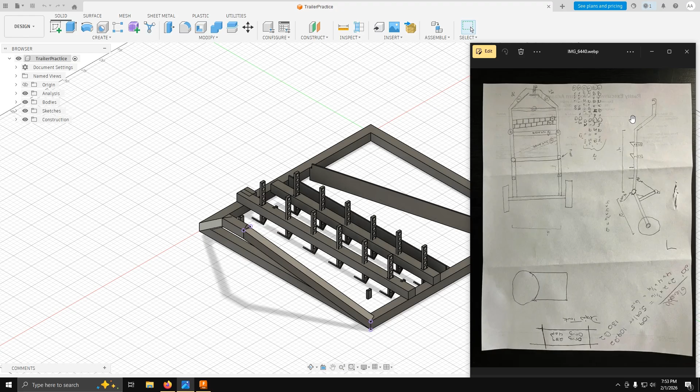This is a tutorial on making your road grader trailer in Fusion 360. We started this project about December 3rd, but I'm continuing with an online tutorial. I'm more than happy to come in and give you an in-person tutorial as well. My friend Alex is going to focus on the rear portion of the trailer, from the pivot backwards, while I'll focus on the upper two-thirds, from the pivot up to the tow hitch.

I went ahead and created this model of roughly what's going on, but we'll make it together in Fusion 360. To begin, we'll create a new design, so we'll do a part design, create new.

This brings us to our working plane. To start off, we'll go up to the top left to this browser area. There's units - we can click on change active units, then make sure we're in inches. Once your settings look the same, press OK.

Also, I'm going to be using the SolidWorks pan tools. If you want to follow what I'm doing, you can double check what you're using by going to the top right, clicking on your account, then preferences. It'll bring up all your preferences, and you can select whatever you'd like. Mainly, I'm using this pan, zoom, and orbit shortcuts as SolidWorks. You can press apply, and should be ready to go.

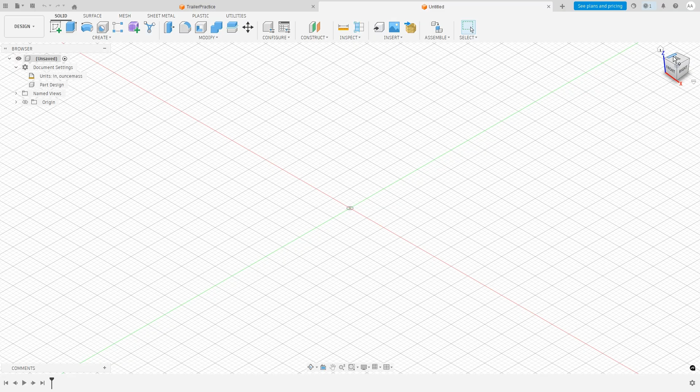To start off this trailer, this middle third is a 4x4 box, a 4x4 foot box, so we'll start by making that. To begin our sketch, we'll go to the top right section where this box is, click on the box, then go to the top left to create a sketch.

We'll click that, and now it'll prompt us to select the plane we want to sketch in. So we'll click here, the sketch top down, and start by creating a rectangle. We'll start off our drawing at the origin, click here, and as you can see, you can drag out for your dimensions, but it's a lot easier to just type them in. It's a 4x4 square.

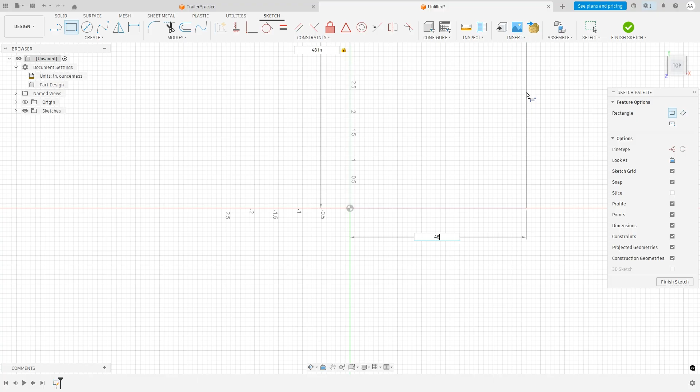Since we're working in inches, we have to convert these feet to inches. Of course, 4 feet times 12 inches would be 48. So we'll type in 48, then to switch to the x-axis, we'll press tab on our keyboard and type in 48 again, then press enter. That's going to be our sketch.

To get this square in our viewpoint, we'll use the pan tool by coming to bottom center with pan, click it, bring up this hand, and center it roughly. As you can see, the square takes up our entire view model. So we'll use the scroll wheel to zoom in and out of the object - scrolling inwards or towards your monitor zooms out. We'll keep doing this until we have a good view of what's going on.

Next we're going to define the square tube. My understanding is that you'll be constructing this frame out of square steel tube, which should be 2 inches in height. We'll begin by sketching this offset. We'll click the offset under modify, bring up this tab, and with curves selected, we'll click on the perimeter.

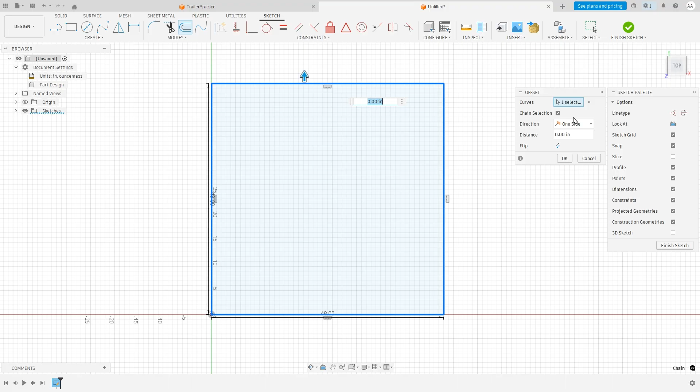Since the tube's going to be 2 inches thick, we'll type in 2 for distance. As you can see, this is going to go outwards, making our part larger to about 52 inches, which is not what we want. So we'll click flip so we keep our perimeter of 48 inches, and when it looks like this, press OK.

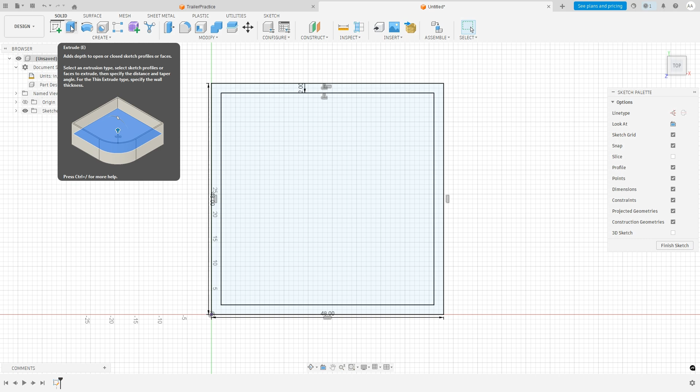That is the perimeter of the frame. Of course, this is a 2D object, so we'll go up to top left again, solid - as we're in sketch, we want the solid. Then there's the extrude cube. We'll click this extrude cube, and it'll bring up these settings now.

We'll click the profile, which will be this perimeter line, the inside perimeter line in between those two. As you see now, it's all blue. The tube will have a height of 2 inches, so we'll type in 2, then enter, and it extruded the object, so now it's 3D.

Granted, you cannot see this in this viewpoint, so you can either use the square up in the top to rotate your view, or you can press down on your middle mouse button and rotate the object. And of course, you can click on the object to reset your viewpoint.

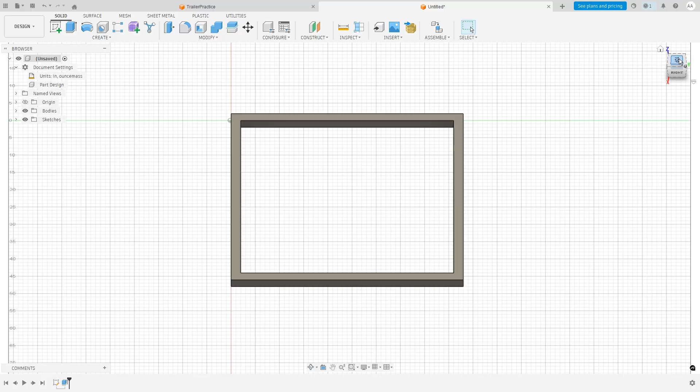Cool, so now beginning with the angle iron, we'll start simple. We'll start with this angle iron here and here, these two points as well. So we'll start by creating those two.

We're gonna make sketches on the inside of this plane, but as you see when I click this front, we can't see the other side of the wall. So what I'm gonna do is reset my viewpoint and zoom out a little bit.

So to solve this and see inside this square, I'm gonna go up to the top center to inspect, go down to section analysis. We'll start off by clicking these yellow planes, clicking the Z axis, and we want to go to the center of the object.

The object is 48 inches long, so half of 48 is 24. So we'll type in 24, and now it's split in half. So click OK.

If you ever want to go back to the full object, in the top left, a little bit lower than the toolbar, there's going to be all these folders, underneath the analysis. If we click the drop down menu on the analysis, this brings up our section view. I can click this eye to take away that section view, but for right now we'll leave it on.

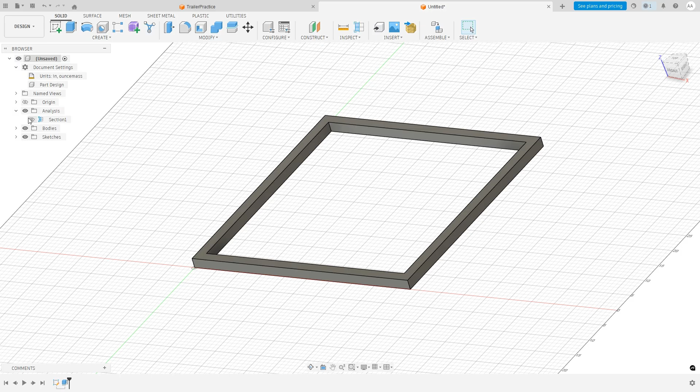So now to sketch on the inside of this for our angle iron, we'll use either the box or the middle mouse to rotate your view. Oh hold up, there we go. So now we're looking at the inside.

We haven't defined which one's the forward-facing direction, so we'll do that now. To start sketching these angle irons to smooth out the dirt, we'll go to create a sketch, and now we want to sketch on the inside of this tube. So we'll click on the inside of the tube, and it'll bring up our sketch plane.

Now I'm going to use the pan tool to center this a bit more. And there we go. So what I'm going to do now is assume that this middle angle iron is going to be exactly halfway backwards.

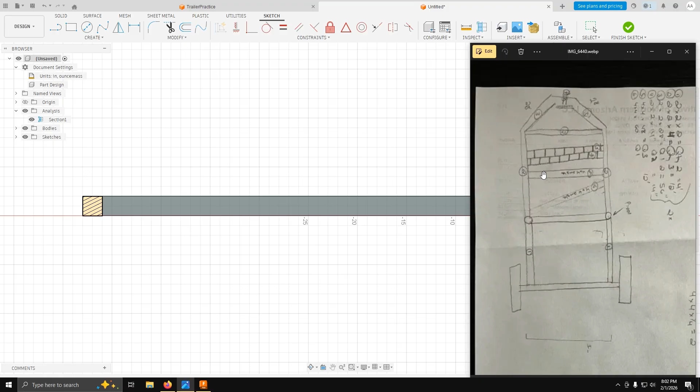So we'll start by bringing a line from the origin. You click on the middle of the origin, now it brings up this line. Keeping in line with this bottom row, we'll go to 24, type in 24 inches, as that will be our halfway point. A good way to check whether or not your line is along that green line is it'll say 180 degrees.

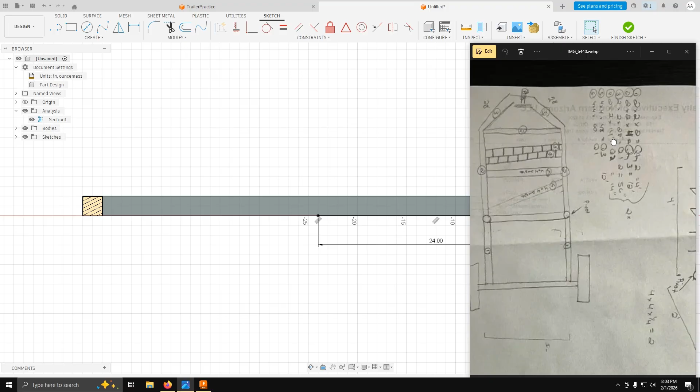Cool, we'll start creating the angle iron. What I have written down is that the angle iron, somewhere in here, is 4 inches tall and 4 inches wide. So to create that profile, we'll go back to this line function.

At this point, what we specified is halfway. We'll start off by creating the angle iron. My thoughts for the angle iron is that it's 4 inches tall, and this beam's only 2 inches tall, so we'll have the middle of the angle iron connected to the tubing.

In order to accommodate for that, so 2 inches here, we'll go another inch beyond. So we'll type in 3 inches, and then we'll press enter.

To get rid of this reference line that we made, we'll actually go up to modify and hit the trim tool. This is one of the tools you can use to get rid of lines. So you can click on the line at both points, and now this line itself is isolated.

So now to continue creating this angle iron, we'll go back to making a line, and we'll click at the bottom of this point here, as we wanted to go an inch below, so we'll type in 1 inch.

Click line again, so now we can start defining the angle iron. It's going to be 4 inches long. We'll click, and pressing left click on your mouse will keep the line tool open. Pressing enter will submit the drawing and close it. We'll use click, just clicking with our mouse to speed up the process.

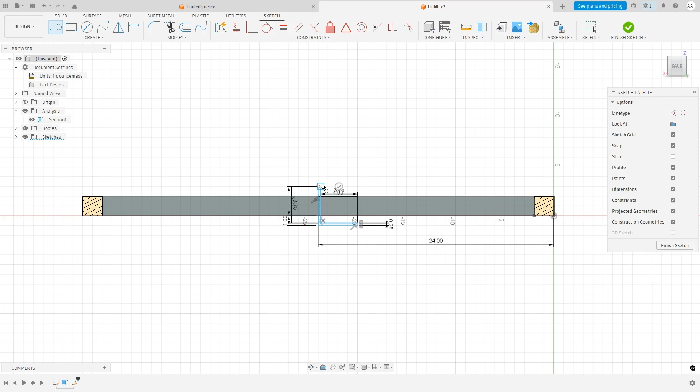Click, then you can zoom in for this next part, and just attach these points as so. Here we'll zoom out, center ourselves, and since we're here, we'll go create the other angle iron as well.

So I'm using the pan tool. For right now, we'll offset the starting point a little bit behind it. We can click here, and let's say we want it 1.5 inches behind. So we type in 1.5, click. To escape this line tool, I'm going to press escape on my keyboard, and it gets rid of the line.

So again, to create this angle iron, 4 inches tall, we'll type in 4, press enter. Then we'll go across 0.25 for the thickness, click, down 3.75, click, across 3.75 for a total length of 4 inches, down 0.25 for the thickness, and then we'll connect it back.

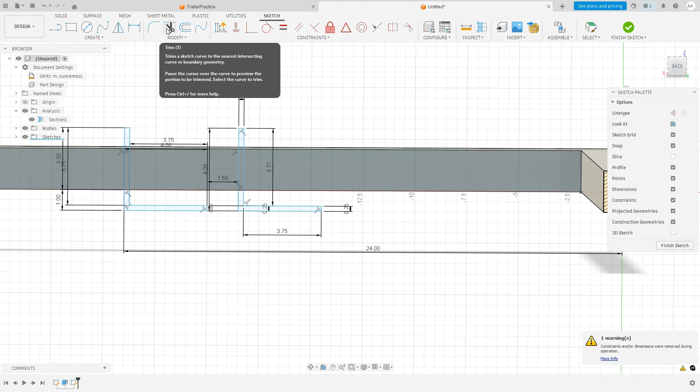Now these two angle irons are connected to each other by this line, which we don't want for later. So we'll go up to modify, click the trim tool, and click that line. Now we have two sketches of the angle iron. We'll hit finish sketch, and the computer loads everything.

Now I'm going to zoom out to get a full picture of what's going on. I'm going to go up to this analysis and hide the section view so we can see exactly what's going on. Now we're going to extrude these angle irons as we have the profile.

To do that, I'm going to zoom in on this first one, because this middle one is going to be straight across, quite simple. To extrude again, we'll go up to create, to extrude. For the profiles, we'll select this box, and this box. Then we'll zoom out.

As we want to reach to the other side, we'll make sure it's on one side and then to object, and we want the other object to be the other wall. So we'll zoom out, zoom all the way around, and click the inside wall. As you can see, it made the part, and it looks all good.

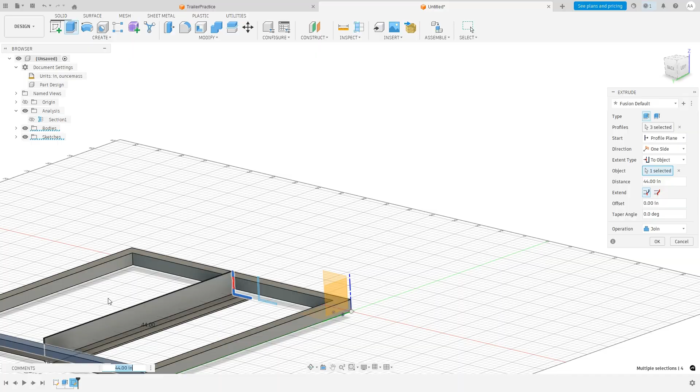For editing these objects later on, make sure for these operations you click new body, so it's a separate item. We'll click OK, as everything looks right. And there we go, that's our first angle iron.

So then going back to the sketch, as you can see, the sketch is hidden right now. We'll go down to the drop-down menu, click drop-down the sketches, and click view to view this other sketch that disappeared. Now to extrude this one, we'll do the same thing.

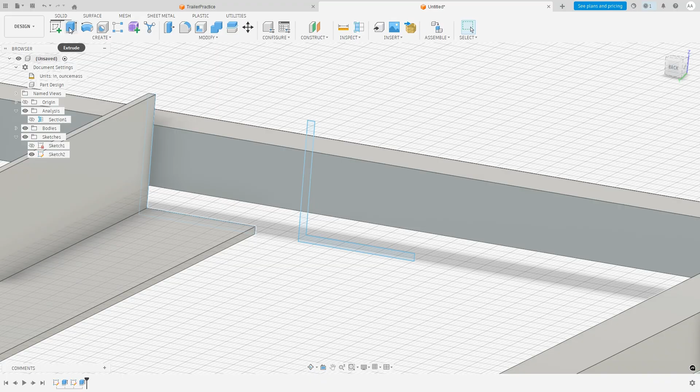Extrude in top right, click on these squares, and we will go to object, same thing, across. Here I'm going to pan, just to have a better view. With that all looking good, once again for operation, we'll go to new body and click OK.

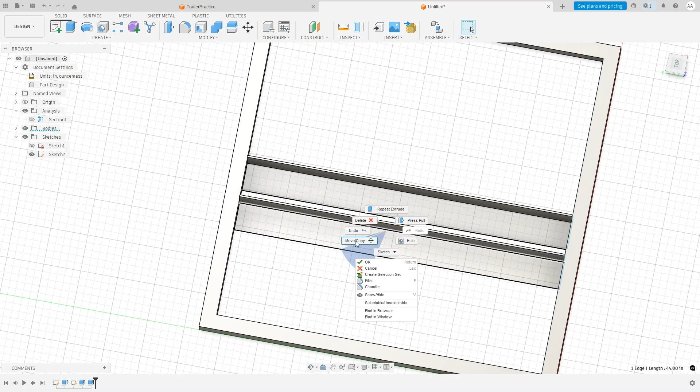According to this sketch diagram, we do want this at an angle. The angle isn't specified, but it looks to be about the same distance, like 1.5 inches roughly for this angle. So we will right click on this object, then there'll be this move tab. We'll click move, and drag the circle as it'll rotate the object. I'm figuring 15 degrees looks about right. You can type in if you want a bit more, but for right now, I'll stick at 15.

Right now, this angle iron is overlapping with the straight piece. So we will drag it down so it's out of the way, and then across.

So it's in the middle like this, so it touches. That looks okay there. So we'll click accept.

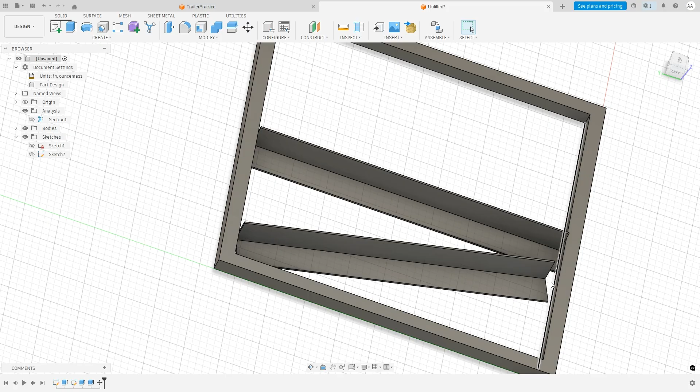Now I'm gonna hide this sketch. To get this angle iron to touch these walls so it looks a bit more proper, we'll zoom in on this one edge, right click on it, and there's gonna be an extrude option. We'll extrude the object, click this wall, and this time we'll use join. And there, that's how you get the angle iron to be flush.

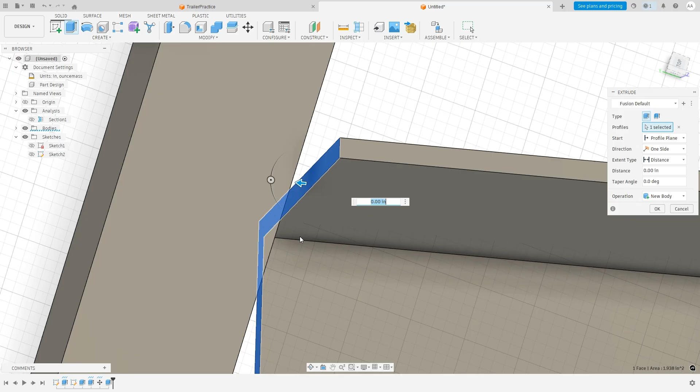Then we'll rinse and repeat on the same side using the pan tool to come over, zooming in. We'll select this inside face—sometimes you need to zoom in a bit more to get a better selection. Right click, extrude, then we'll do to object, select the inside wall so it mates up well, and click OK. Okay, cool, this is kind of what we're looking at right now. So we have our angle iron set.

So did a little bit better job on this one. So now this next part is this angle iron setup to chew up the dirt.

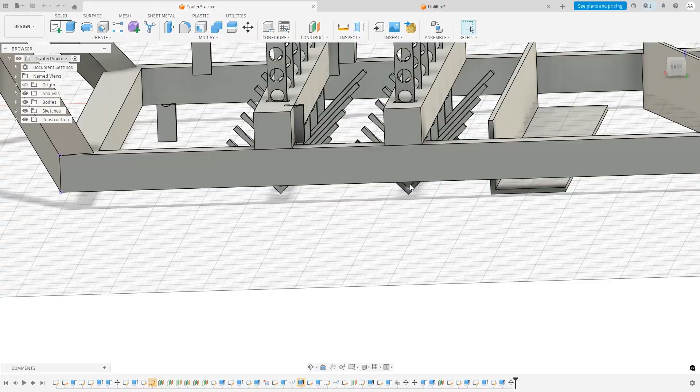I admit it's been a while, so I don't exactly remember how you want this angle iron setup to be, but my own two cents was this: we'll have the same diameter square tubing going across, and then we'll have these angle irons at a 45-degree angle with adjustable holes, so those could break up the dirt, and of course they're offset, as you can see. So that's my own two cents of how I thought that should be done.

So to start off, we'll go back to our own part. To begin sketching these angle iron shapes, we will create a plane to sketch off of. We'll go up to construct, click offset plane, then we want to sketch off the inside of this tube, so we'll click on the inside.

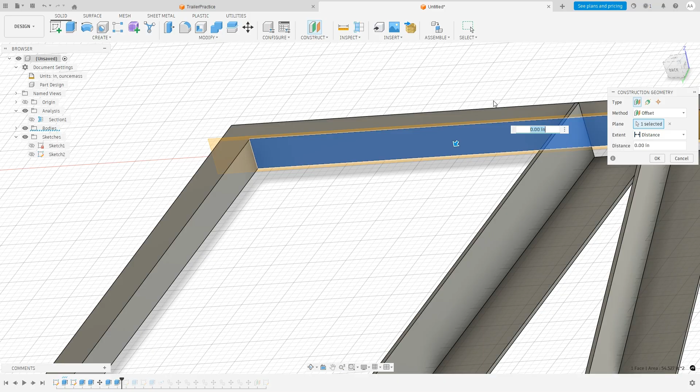So doing the math—between wanting 6 angle irons and 40 inches across, I want these spaced 6 inches apart. The tube, of course, is 2 inches wide, so we need 4 more inches to get the 6. So we'll click there. Now to start sketching, we'll go top left to create a sketch.

Then we'll click on that plane we just started to sketch on. Now, of course, our view is blocked by the bar, so we'll go back to analysis and rehide the section view. Now we can see inside, everything's looking proper.

So now we'll click on the line, and now we get our grid up again. Each one of these grid squares is half an inch, so we know from this angle iron down here that 2 squares down is 1 inch.

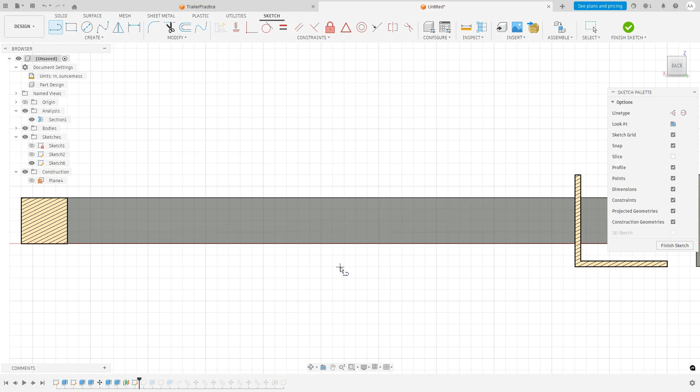So we'll click down here and start sketching this angle iron. Of course it's 4 inches long, so we'll type in 4, then press tab to get the degrees over here. We'll type in 45 degrees, left click.

Then I'm going to do the other angle, so I'll press escape, go back to the line, start again at this vertex. It's 4 inches long, so we'll type in 4. Then to lock in this angle, since we're going the other way now, it's going to be 90 degrees plus 45, which is 135 degrees. So now we'll left click on the mouse so we can keep sketching.

Go back the other way. The angle iron's quarter inch thick, so we'll type in 0.25, tab, make sure it's at 90 degrees, left click.

And then, of course, to get back for the thickness, it's gonna be 3.75 inches. Click tab, we want 90 degrees. Left click, and we'll go back this way—4 inches long, tab, 90 degrees, click.

Oop, almost—I did 4 inches, that's my bad. Sorry, we'll do that again. 3.75, to account for the thickness. And we'll type in 90 degrees.

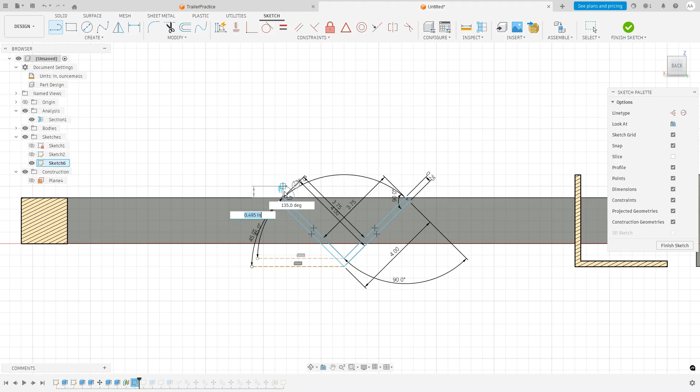Oop, where's my mouse? Hold up. One more time—3.75 inches, and then 45 degrees. And then lastly, we'll zoom in and connect these dots.

And then we'll press finish. We'll go now extrude this object. I'm thinking for this object we'll just use 1/2 inch thick angle iron, so we'll type in 0.5 for the distance, new body of course, and we'll click OK. And that will be our angle iron extrusion.

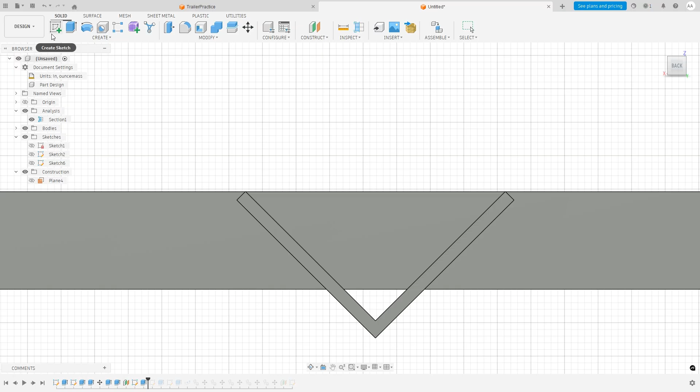Now in order to mount this angle iron to a pin system or something, I was thinking we would use a 1 inch wide, 1/2 inch thick plate steel. So going again, we'll go on constructions, we'll click view on this plane so we can draw on it again. So we'll create a sketch again, click on the yellow plane we just highlighted again, brought us back to the origin, so we'll pan back over.

So we'll go back to line. Starting off at this vertex, I was just gonna say it would be 1 inch wide. So of course start off in the middle, so we'll do 0.5 inches for our first point. So now I'm gonna press escape.

Now we're gonna go up and select the rectangle. We'll start on this outer point. We'll drag it out. I was thinking to give the most amount of mounting options, we'll make this 10 inches tall, so we'll type in 10. And then to lock in this width, I'll type in 1 inch. And then enter to lock in the part.

So we'll click down here at the vertex. Roughly, it's not on the same sketch plane, so that's why we won't be able to snap. But we'll click roughly about where that other vertex is. And we'll draw out to where it meets up with the line, about there. And then going back about there. And now we'll go up to modify for the trim tool to get rid of these lines. And then there we go.

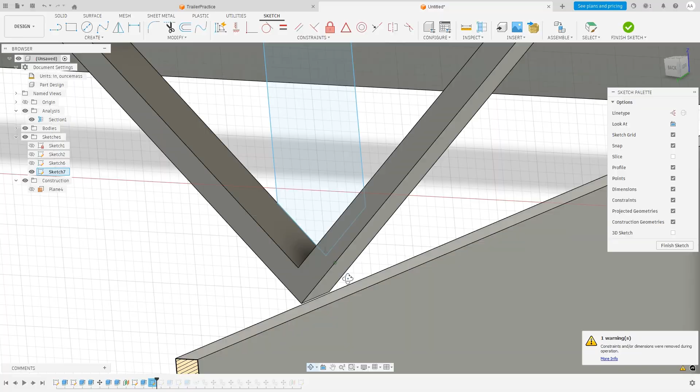We have our angle iron, or our plate steel. So now in order to make this meet, we'll go back to solid and we'll click extrude, click on this plane, then 1/2 inch thick, and it's wanting to cut, so we're actually going to do a join or a new body. We'll click enter, and then there we go. So we have our separated plate steel from our angle iron.

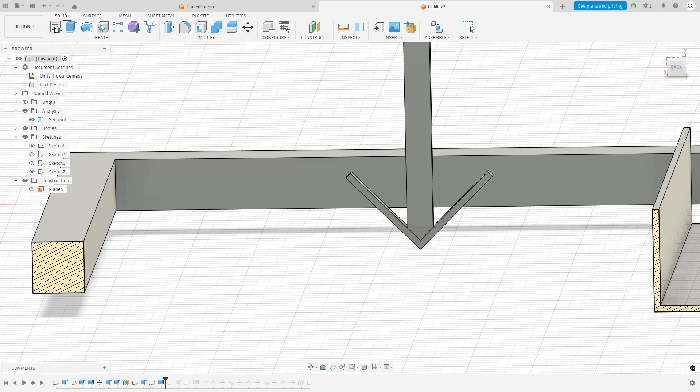And now in order to create these holes for a pin system so we can lock in the height, what we'll do is we'll click create a sketch, and we're going to sketch directly on this plate steel face. Browse back to the origins, we'll pan back over, and then we'll go click create a line. So start the vertex all the way down here, go up 1.5 inches, and we'll click enter. And now we're going to go back to create.

Now we're going to do center circle, click on this point we just made. Then I was thinking 0.75 inch diameter, and then we'll press enter. So now we're going to go back to this modify tool. We're going to click this trim tool, get rid of that line, get rid of that line, and now go back to solid, click extrude.

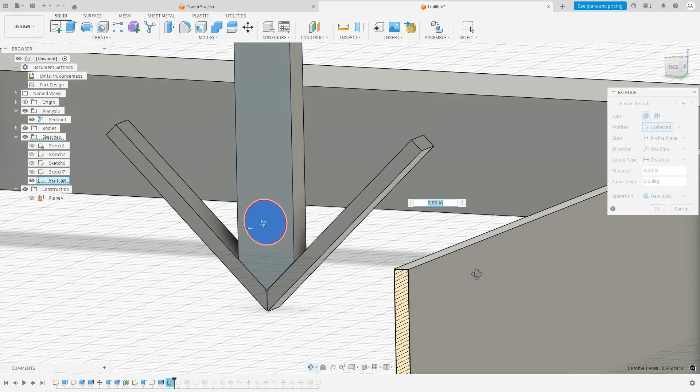Then on this profile, we'll click on that circle we just made. I'm going to rotate it just so we can see what we're doing. And then for operation, we're actually going to do cut, as we want to cut away a hole. So we'll go back to this distance, we'll go 0.5 inches. As you see, it's wanting to go outside, so we'll put a negative sign in front to make it go all the way through. That all looks good, so we'll click OK, and then there we go. Now we have a hole for a pin to slide through.

So now to copy this hole up and beyond, we'll go down to create pattern, and we'll do pattern along a path. I think default option is bodies. So we want to click features because this hole is actually a feature of this part we just made.

So we'll click on the circle as so, and then the path. So I'm going to zoom out a little bit so I can see a little bit better what's going on. Sorry, so I'll go back to pattern, circle and pattern, features, select the circle.

So now back to the path. We're going to select one of these lines on this plate steel, as we want the circle to go up the line or in line with that. So now you can see there's this dashed construction line that's telling us that's where the circle is going to go.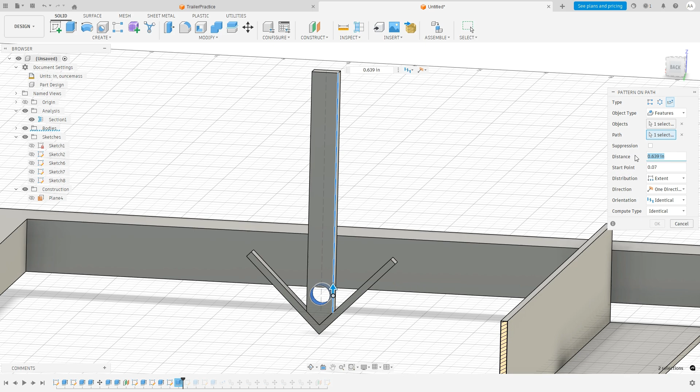So now for the distance, so the entire plate is 10 inches long minus the 1.5 inches, as that's where our circle starts. And then I'm going to take off another 1/2 inch just so the holes don't go beyond the part. So I'm going to type in 8, and then there we go. That's the holes. So this quantity thing, you can go up or down for how many holes you would like. I think I'm going to go about to 8. That gives us a good bit of options. So now we'll click OK, and then it cuts holes through all of them.

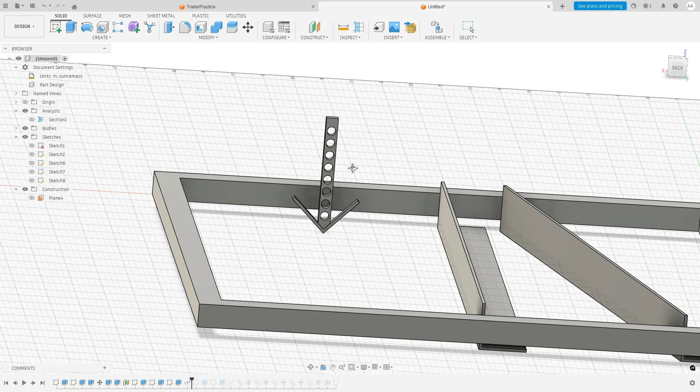So now I'm going to zoom out just so we can see exactly what's going on with our part. I'll go back to analysis, hide the section view just so we can see the entire part. As I was saying earlier, I want 6 of these parts, but it's quite a hassle to do that entire process all over again.

Luckily, we can actually go copy these items. So we'll right click, move and copy, and make sure it's on bodies as we just created a body. We'll select the handle and select the angle iron. The move type should be on free move by default. We're going to want to switch over to translate.

We're going to want this part to come across to the other wall, so it gives us our component directions. We're going to want to bring the Y direction. The reason why I know this is in the top right for square, it gives us our axis with X in red, Y in green, and Z in blue.

I was saying I want these spaced out by 6 inches, so I'll type in 6 here and create a copy. And then there we go, we have 2. Now I'm just going to go a bit fast to get all these angle irons in. I'll keep going till I have 6. There we go, now we have 6, and they're all evenly spaced, more or less.

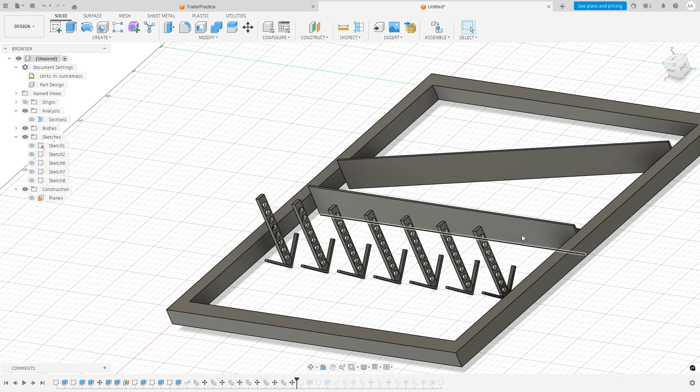So now I'm going to go back to sectional view. I was thinking what we could do for mounting these was using the same tubular steel, or sorry, square steel that's going to be used for the frame. In order to do that, we can sketch that by going up to construction, offset a plane. We want this square tube to be mounted off the top of the frame.

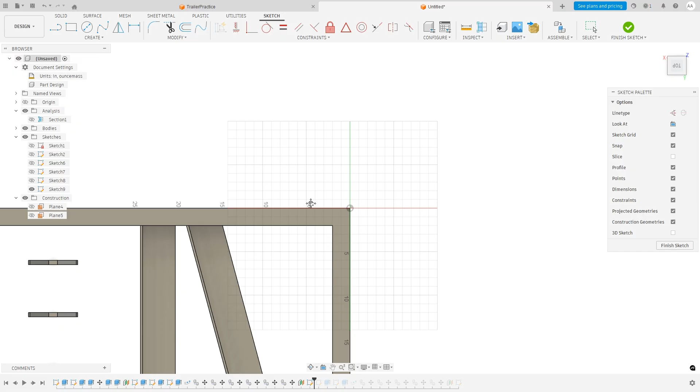So we'll click on the top of the frame. It gives us a big orange frame. We want to be touching, of course, so leave the distance at 0 inches. Click OK. Now to start sketching, we'll go to create a sketch, and we're going to click the plane we just created. It's going to bring us back to the origin, so we'll use pan to zoom back over.

Now we're going to zoom in on this bottom part, I'll tell you the reason why. This entire part is 1 inch long, and we want this to be in the center of our tube to go across. So click on one of the vertexes, we'll go across - either way, we'll do this way, 0.5 inches, as the tube will stick out 0.5 inches.

So now we're going to zoom all the way out. We might need to pan over. So we'll click on that, all the way down. So 6 inches, we just want to get to the edge of this. 6 inches at 90 degrees sounds good.

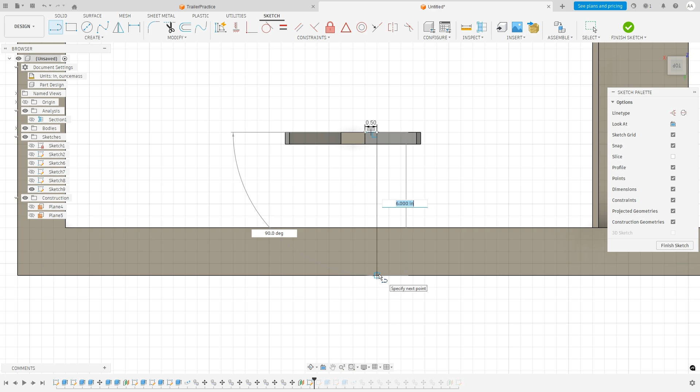Now we'll press escape, create this 2-point rectangle. We'll click. Now we're going to use the pan tool to zoom all the way up at the top here, zoom out, back to the rectangle, click here, all the way up.

And it's at 90 degrees and across 2 inches, so 48 inches looks good. And then it's 2 inches thick, so we'll type in a 2, and then there we go. So now zoom back into this line we created. We want to get rid of this, so again we'll trim tool it out, and that's looking good.

So now as you can see, we have this line going all the way across, even a little bit. So now we're going to extrude this by going to solid, extrude.

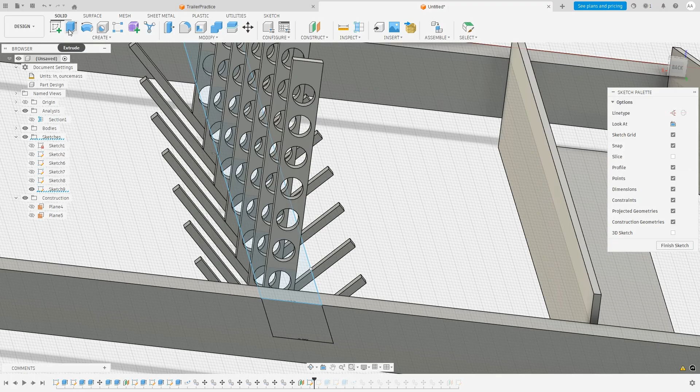It's already selected by default, but you might need to select the plane that we just used. We want it to be 2 inches tall. It's going to be cutting, but we want a new body. It should look like that. Press create.

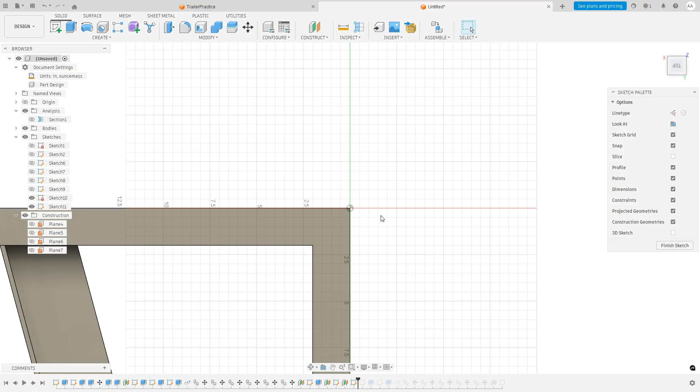Alright, so now we're having some collision issues as this handle is being phased in with this tube. So what we'll do to counteract that is go up to construction, make another plane, and click the top of this box. Again, 0 inches because we want to draw directly on top, and press OK. Now we're going to hit create a sketch, click on the orange, bring us all the way back to the origin. We'll zoom all the way back, and then we'll start on this first one.

Now what we're going to do is create a hole so this can slide freely up and down. I'll start by clicking here to outline this box, then go up to offset again like we did at the beginning, click this outside, and do 1/8 inch for a gap. If it's going inside but we want it to go outside, we flip the direction. That looks good, so we'll click OK.

We'll go back to solid, extrude, click that rectangle we just made, and switch the operation to cut. I'm going to rotate the view so we know what's going on, and we'll do 2 inches so it goes all the way through. It's going the wrong way, so let's type in -2, and then click OK. And that's how it looks.

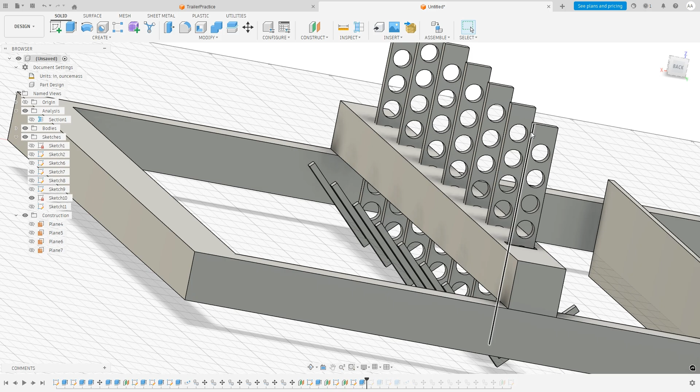Unfortunately, I cannot get the pattern tool to work as I was showing you, as this method has a bit of collision errors with this big long face. So unfortunately, in this instance, just because the software can't do it, you would need to manually do that for every single one. So I'll do that.

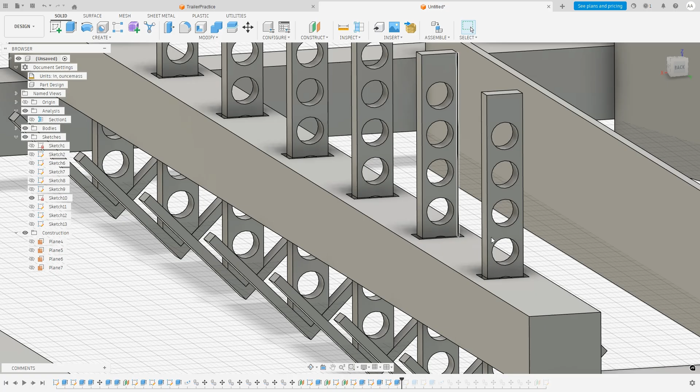Okay, so now I've created extrusion holes for all these slots so they can move freely. Alrighty, so now moving on, these pins need something to lock into. Because we put pins in the top, all these dowels are being pushed upwards, so pins don't really do too much good other than gravity. So once again, we're gonna make a mounting system for these brackets.

So we'll start by creating another plane. Oops, sorry about that, my headset died or turned off. So we're going to want to weld on some mounting tabs onto the top of this bar. So click the top of this bar, then we make another plane, again distance 0 inches, create a sketch. Click that orange frame we just made.

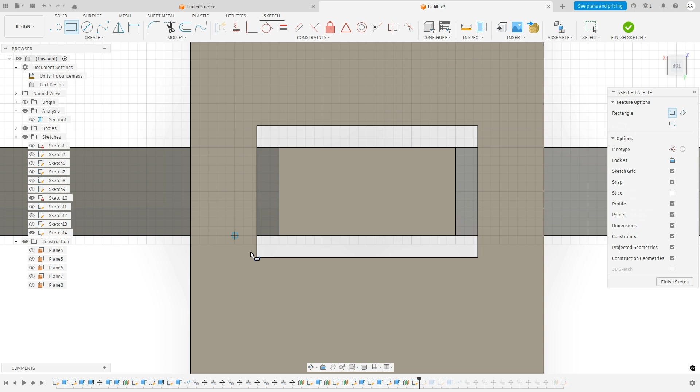Zooming all the way back, we'll start at this one, so we'll use the rectangle function. We'll click on this corner here, and then, of course, it goes over. We're going to make this tab 1/4 inch thick, and then 1.25. And that will be our tab.

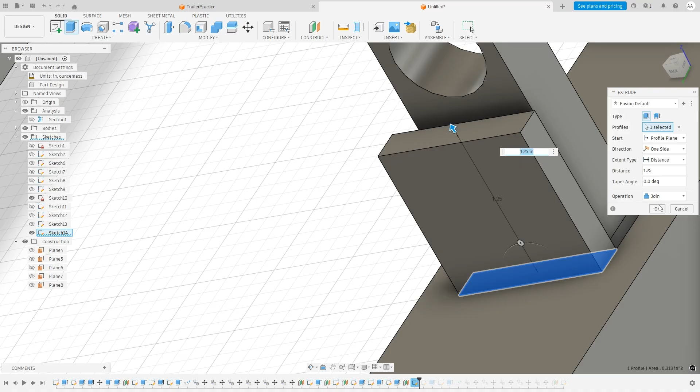So we'll go back to solid, go extrude, that's selected, so we'll go up 1.25 inches. Yep, that looks about right. And we'll do new body just for ease.

And so then now we're gonna make another circle on this, so we have something for the pin to slide through. We'll click on that face, brought us back to the origin. We'll zoom all the way back, go here, and we'll click line. Oops, sorry, I'm looking totally at the wrong spot.

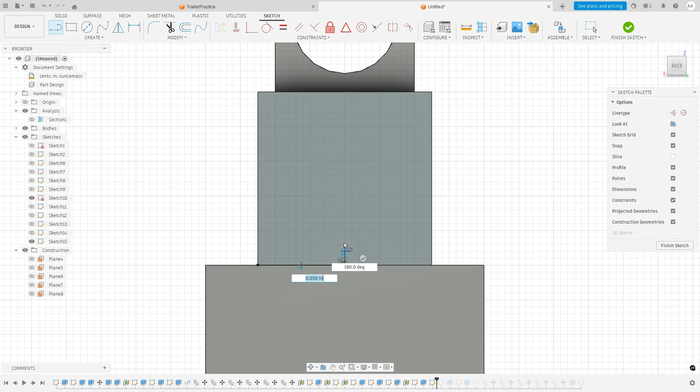This is the tab we just created, so it was 1.25 inches wide, which was 0.625, so we can click there for a reference point here. 1.2 inches tall, so we'll go 0.6 inches, so that's gonna be our center. And then the holes on our tabs are 0.75 inches diameter, so we'll do the same diameter here. Use the trim tool, get rid of these reference lines, and then that's looking good there.

So go back to extrude, click on the circle. I'm gonna zoom out just to see what we're doing. This tab's only 1/4 inch thick, so we'll type in that, and we'll do cut, so negative 0.25, and then boom. Granted, not perfectly lined up as is, but of course can be adjusted.

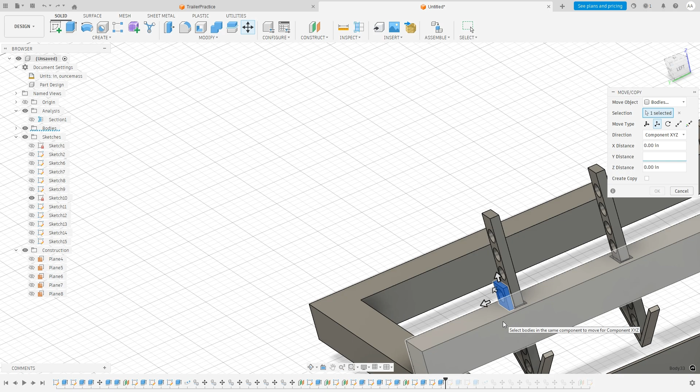All right, and we copy the tabs along. We'll right click, copy, do bodies, select this square, and then again with our axis up top, we know where we want to go in the y direction. So doing the math of 1/4 inch gap with 1/4 inch gap, and the bar itself is 1/2 inch thick, so the whole thing will have to get moved over by negative 0.75. Create a copy. Ooh, maybe a little bit more math was needed there. I think it was 1 inch. Yeah, because that's looking right there. So we'll create a copy, and then there we go.

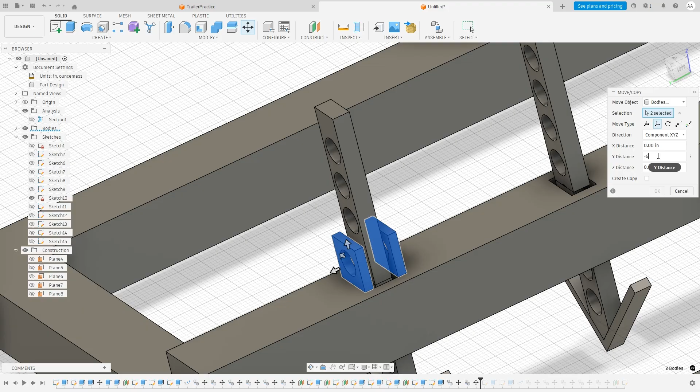Cool, and just like that, we made all our tabs. I won't leave it in here just because these holes aren't aligned as is. But in case you wanted to create a pin to use, here's what you could do.

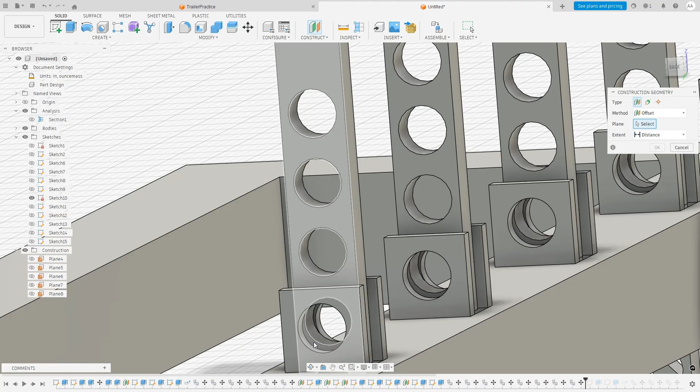Once again we'll do another plane. We'll select the outside of this face, and since the entire thing is half an inch thick, we'll go negative 0.25. As you can see, the orange is in the middle now, so that looks good. Then we'll create a sketch, click this plane, and browse all the way back to the origin.

We'll zoom all the way over, then create a line. That's going to be the center of the circle here. So for clearance, we'll do a half inch diameter pin. Click enter, solid, extrude.

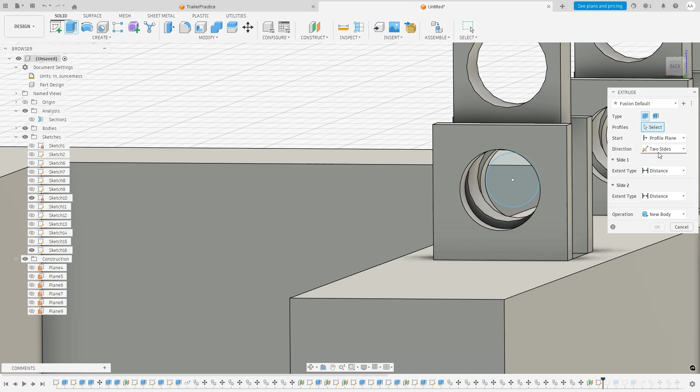For this pin, we'll actually do two sides this time. New body - give me the drop down please. There we go, now it's selected. So we'll go 1 inch on one side, yep that'll be enough, and 1 inch on the other side. There we go, and we'll click OK.

Actually, with this clearance - sorry, let me zoom back in - with the half inch, that would be enough. So once again, we'll use the copy paste feature just to shoot them all across. I'll do that real quick.

Oh, and there we go. We have pins for all of the angle iron. Okay, that was a good bit of work. And again, we're not going to go do that all again.

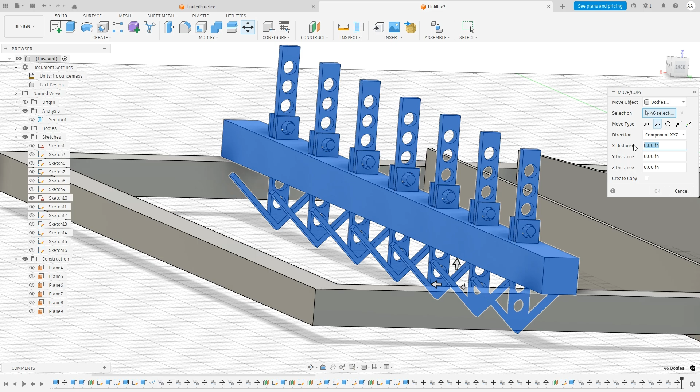Then we'll throw this off in the X direction. As you can see, X is forward of it, so we'll do 7 inches. Let's just see how - oh, of course, create copy, so we know what we're looking at. And yeah, that looks about right there.

Of course this isn't going to be as useful because these are in line. So what we're going to do now is offset them. Our Y is going to be left to right, so we'll do, I don't know, like 3 inches. How does that look? Maybe 2.5. Yeah, something like that will work. Cool.

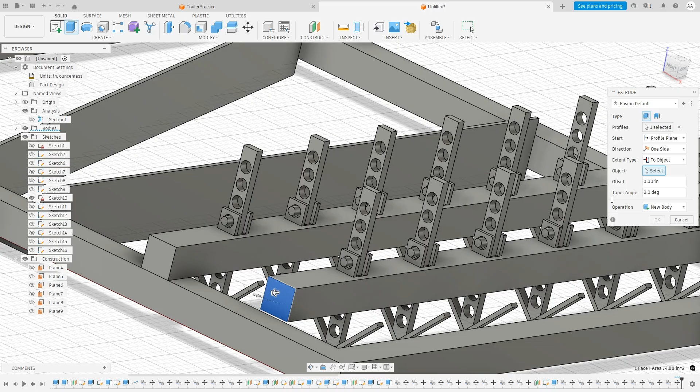Of course you can always use this copy paste to put another angle iron here, but for right now I'll show you how to move this block over. We'll right click on the face of this, click this extrude here, go to object, click the outside of this wall, and we'll do join. So now it's level, but what about this other side? Because this other side's actually sticking off.

So we're going to right click on it, extrude. This time we're actually going to cut, and we're going to do to object. We'll do this inside face, so it gets rid of that block as you can see there, and click OK. There you go, now that is flush on both sides.

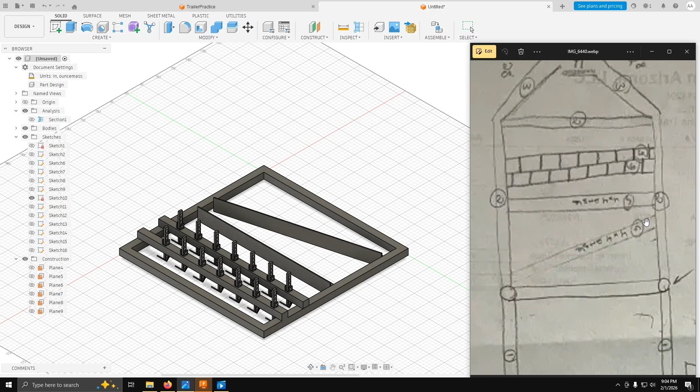So just to recap - whoop, if this can look a bit nicer - okay, so the recap, we've done the entire frame, we've done these angle irons, and we've even done the drop downs. So this would be a great time to save.

Because that would be terrible if I lost it because I didn't save this entire time. But now we're good, now we're saved. So definitely save often, because that would have really sucked if this crashed and I lost all this work, because I spent a good chunk of time doing this.

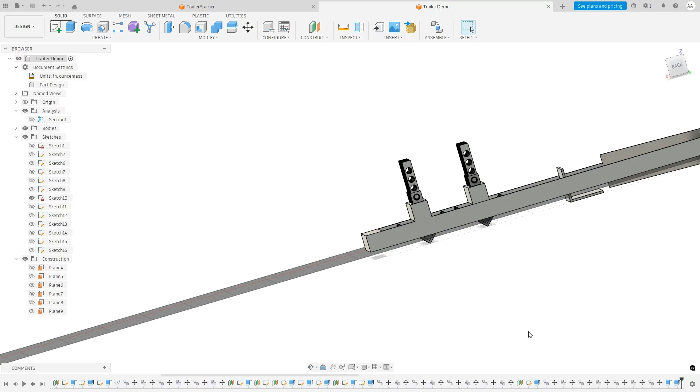So now this very last part is going to be this hitch receiver, this section right here. So what I was envisioning for that - all right, let's see - I'm not exactly sure which truck you were planning on using for this thing, but according to a quick Google search, the average hitch receiver tow ball sits about 20 inches off the ground.

So let's start off with that. Before we join any of this tube up to the tow hitch, we will create the platform for the tow ball to mount onto.

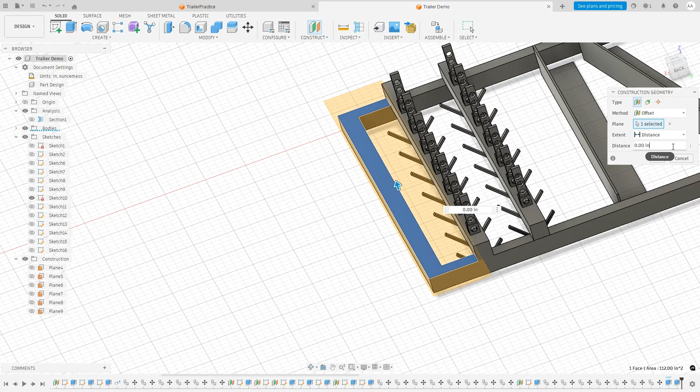So to do that, we will create a plane. We'll click the top of this trailer frame, or the top of the frame, and then set 20 inches. Since this is already 2 inches off the floor, we'll go 18 inches.

That will give us our approximate height of what a standard truck height would be. Now we're going to go create a sketch, clicking on this orange plane we just made, and of course pan over to get away.

Now for the distances, I was thinking we could have this about 3 feet away. So use center line to find the center. Again, it's 48 inches long, so do 24 for the center, and then we'll go out and do 3 feet. 3 times 12 is 36, and then click.

We'll create a line here, as this is our center point. I was thinking maybe a 6-inch or like a 1-foot section of bar for this to attach to.

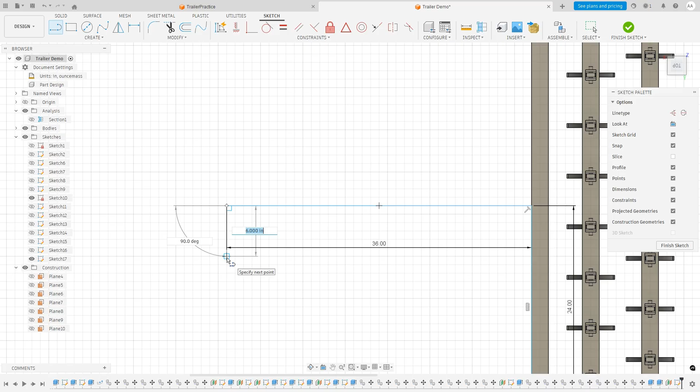So we'll click down on this point here, press escape, click down here, and make this 12 inches for 1 foot. And of course we're going to be using this square tube again, it's 2 inches wide, and then we'll press enter.

Then we'll use this trim tool to clean up all these construction lines. Get rid of that line, get rid of that line, this inside line, and then there we go.

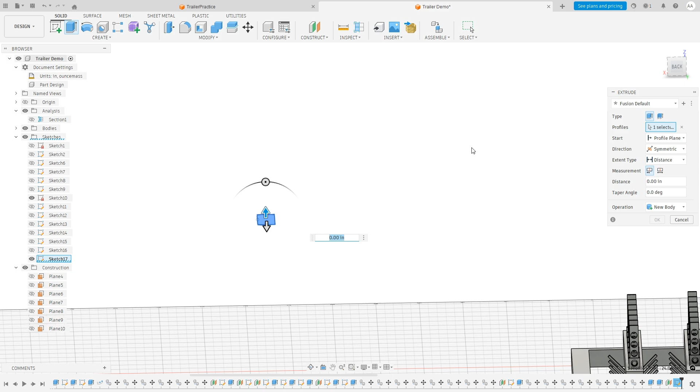Now in order to mount this frame to this section, we're going to make this tow hitch spot a 3D object first. That means we're going to have to extrude, and we will do both directions just to keep around the 20 inches tall mark, and then we'll do 1 inch each side symmetrically for a 2-inch square as we've been using, and there we go.

Okay, so now to connect this hitch receiver point down to the trailer, we're going to need to sketch a few lines here. To start off with that, we'll create a sketch. We'll click the outside of the frame, and then in the sketch palette on the right, which we haven't used too much, we will click 3D sketch.

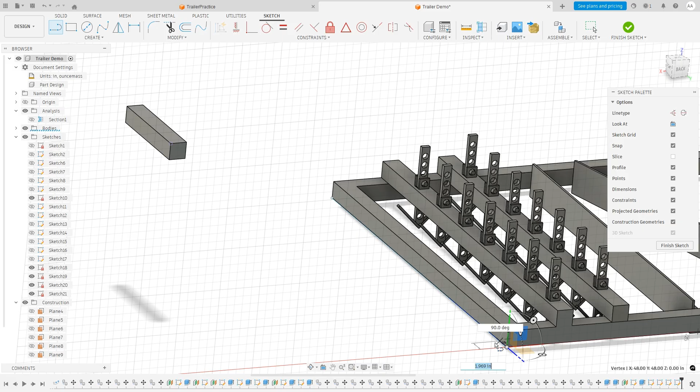Now we're going to pan the camera back, kind of 3D-like, so we can see both points. So we're going to hit a line. We'll start on our trailer vertex here, all the way down to here, bring it all the way across to here, then up, and all the way back, and there we go.

To make this the square tube we've been using, we will extrude on that 2 inches. It's going the wrong way - make sure you select new body and click OK. And then there you go.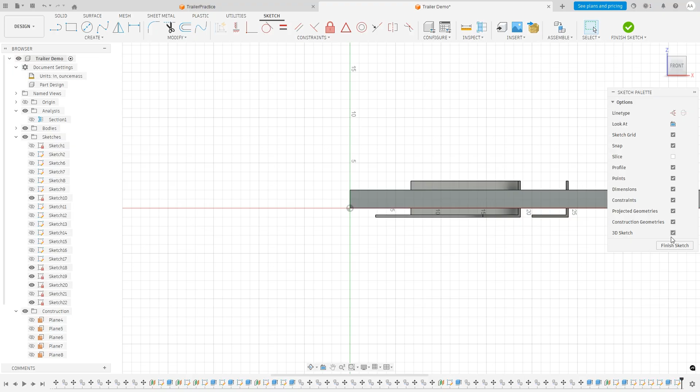We'll rinse and repeat for this other side. We'll go create sketch, click this outside area, make sure 3D sketch is still selected, and use the box and whatnot to get back so you can see what's going on.

Select line again, start that vertex, go down one below it, all the way across, up, all the way back. When that looks good, go extrude again, 2 inches, make sure it's on new body, and press OK.

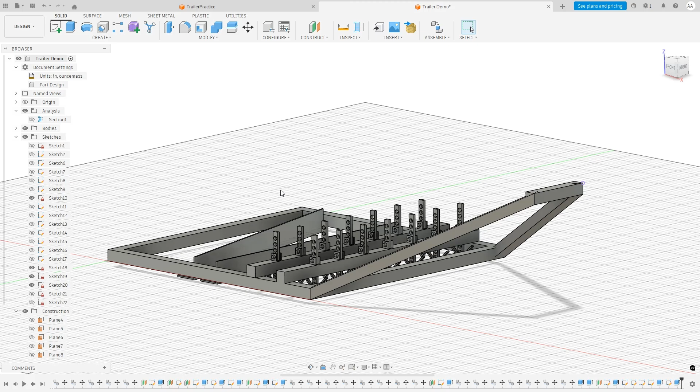And there you have it, that is a trailer you made in Fusion 360. One thing you can do is that there's plenty of online models out there that actually will have a tow ball attachment, or like a hitch - the thing where the tow ball plugs into for a trailer. There's various models like that exist on the internet, so you can download it and insert the part.

And again, we'll save. That is the first part for creating this trailer in Fusion 360. Where did the image go? Yeah, that is the first two-thirds of the trailer there.

Alrighty, so we made the part now, and for this to actually be useful, we need to know the dimensions of all these things. So one thing you can do for real quick checks is go to Inspect, click Measure, and it'll tell you a variety of things. Like if I click here to here, it'll tell me the angle, 90 degrees.

Click this clear selection to view other things. Like if you wanted the angle for this angled angle iron, click that and that - it's all 75 degrees.

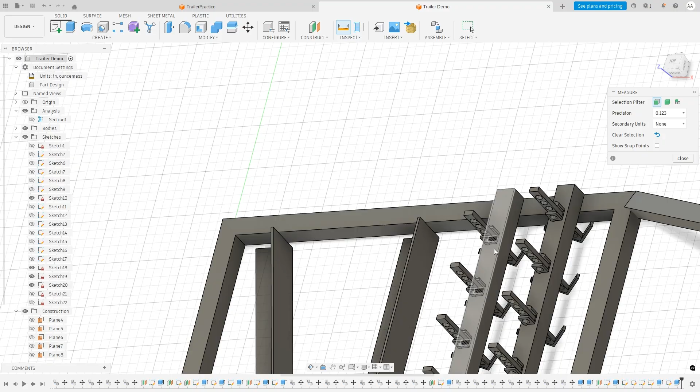And it's stuff like that where it'll tell you some real quick things, like 54-degree clocking angle. But for the more important stuff, we'll go to the very top left and go to design, all the way to drawing, and then from design.

A real easy way to get started is to click automatic, then ASME, but these don't necessarily matter too much. Then we'll do sheet size E, just so it's the biggest, so you can put the most amount of stuff on it. Granted, for printing you might need to size this down to a standard A size sheet, but for right now we'll do E just to keep the scale a bit high. So we'll press OK, and it's going to generate this for us.

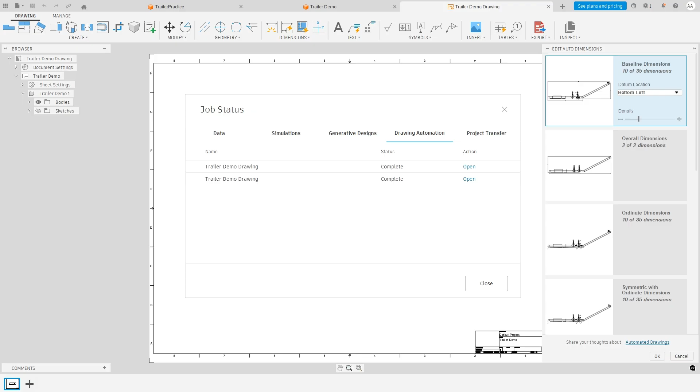So we'll click on this, and whenever it's done, it should just open. Loading, loading, loading, loading still. Nope, there we go. All right, that took a second.

All right, so there's a bunch of these automated ones, but for right now we can just kind of do this. Turn up the density a little bit to see a bit more. Try to select this entire box. Oh, there, oh it almost wants this. That might be a little too much, we might just leave that a bit lower.

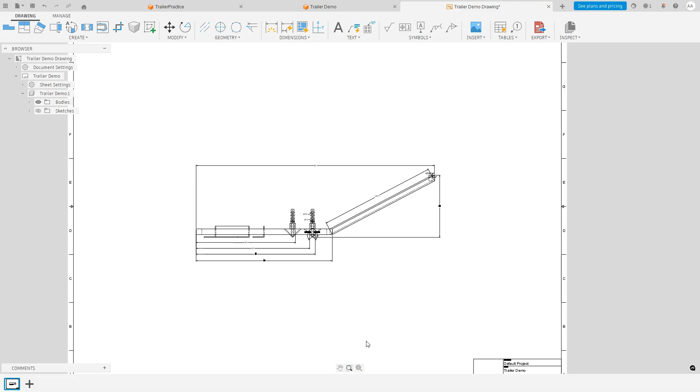Okay, we'll just click OK. Oh man, my computer's not liking this at all. Let's go back up here to move, just so we can select things. Hopefully drag it down, and I'm using control, or the scroll wheel, to zoom in again. Oh, my computer's not liking this at all. There we go.

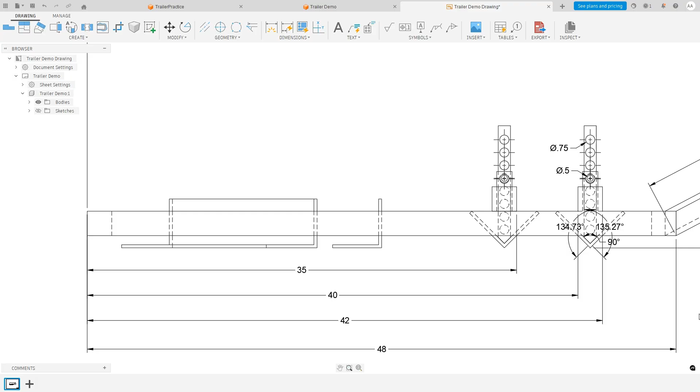Cool, so it gives us some automatic dimensions. These can be useful or not, but to give us our overall section views, what we're going to do is go up to the top left and use our auxiliary views. So click that one. This one's going to tell us to select an edge.

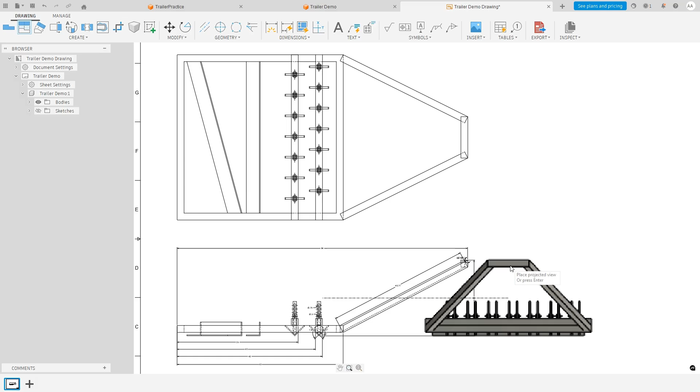So click that. Ooh, it's huge. We'll put that up top here, and that'll be our section view of the top. And we can move this over, and do another projected view of the side. There we go. Granted, that one's not as helpful, but as you can see, it gives you all the different angles, like behind as well. But that dimension is quite easy, so I might just leave that out because it's not very helpful.

Alright, so to get more of these dimensions, let's see if this auto-dimensioning thing works. Even though it is quite loud, so we might just do it manually. Luckily, dimensioning is pretty easy.

So we can start on the perimeter, for example. We can click here, and then, oh actually hold up, for these dimensions we can click that point. So at that point it'll give us our whole length, and since this is just one solid bar, there we go.

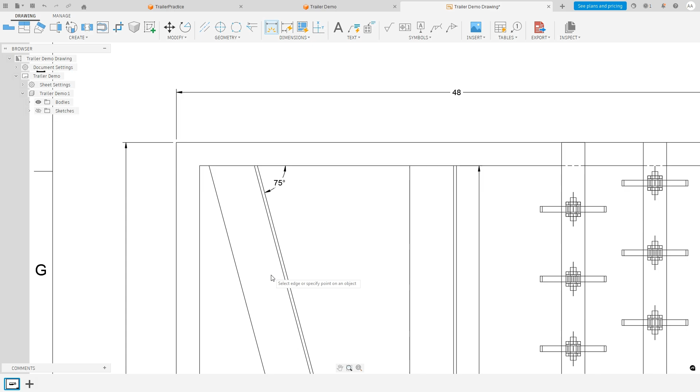Then for these inside angle irons, click on this outside, that length. Then for this one, it's a bit more tricky. We can select that and that to get our inside angle, and then, sorry, let me move that. Go back to dimensioning, click up here, and I can give you the length of that inside edge. Then go out here for the outside edge, which is the same, so I'll just leave that there for now.

Using pan, move over here. We'll use dimensioning for that, then for that, and then for that. And we can use this for this inside edge, 63 degrees. And of course this one's going to be that.

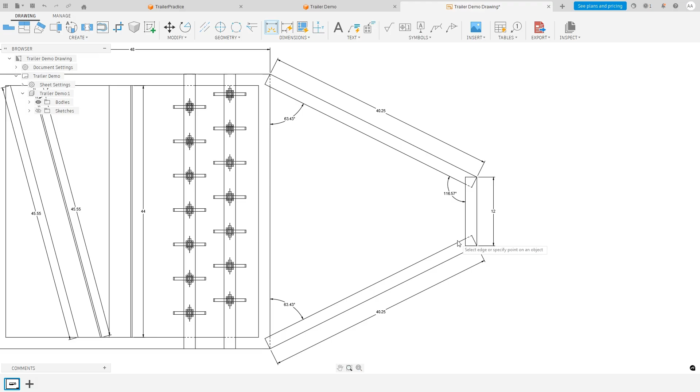And this will give you your clocking angle. I need to reselect that, from this line to that. Can you give that to that? Yeah, there we go. Yes, that's your clocking angle there.

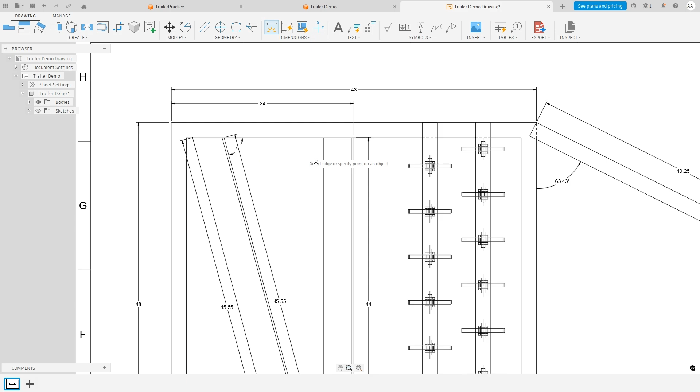And then of course for more of these dimensions, for how far up, 24 inches. Go here for that to that, 48. But this is very much just filling it out, a bit tedious. Oop, that's not what I want to do. Just a little bit tedious, but that is the gist of it for your main dimensions.

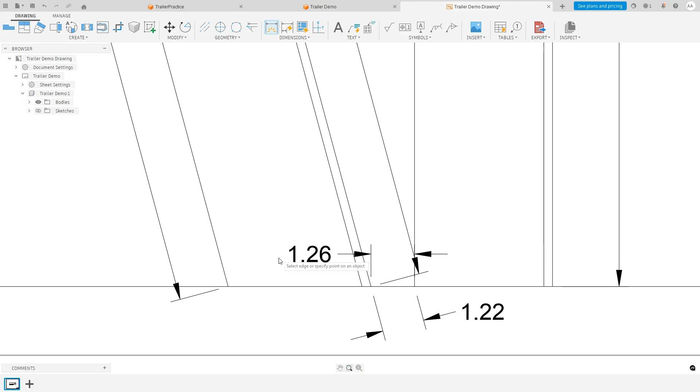You can always do vertical, vertical, that as well. There we go. Luckily, there are engineering standards, ASME, ISO standards that tell you how to make these drawings, but for your own personal need, you can kind of just use these dimensioning tools to get the angles you want.

But yeah, that's kind of it for this first part. I'm hoping it was useful, and I hope to work forward with you soon.